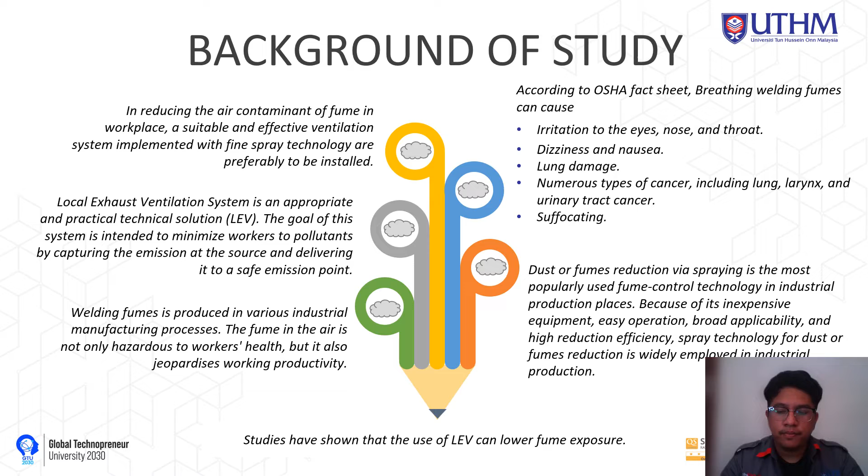The problem statement of this project is: as we all know, welding works are widely active in the industry throughout the globe. While working on welding, workers will be exposed to smoke, or what we call fume. Many workers don't even know what type of contaminant is contained in those fumes. Some of them are unaware that it brings harm to human health and also causes pollution. As such, a local exhaust ventilation system with a fine spraying system to act as a filter should be implemented in the industry. It will help reduce welders' exposure to welding fumes and divert the plume away from welders' breathing zone.

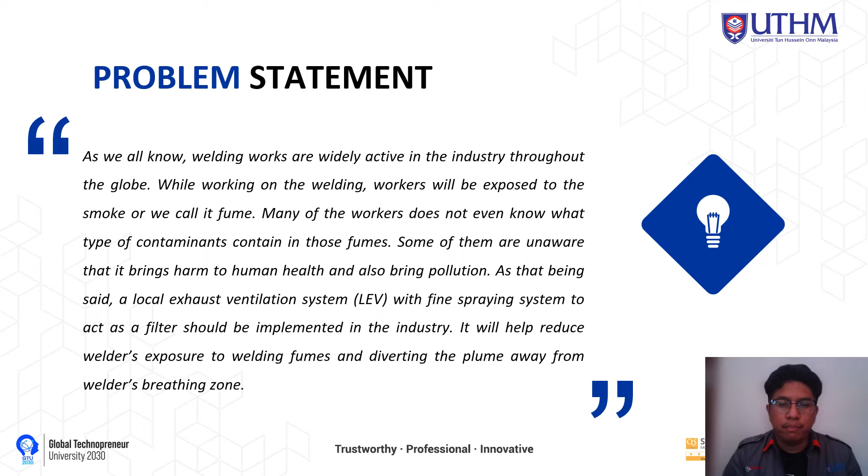Moving on, the objective of this study is to implement atomization technology in the welding exhaust ventilation system to remove air contaminants from a welder's breathing zone and work area.

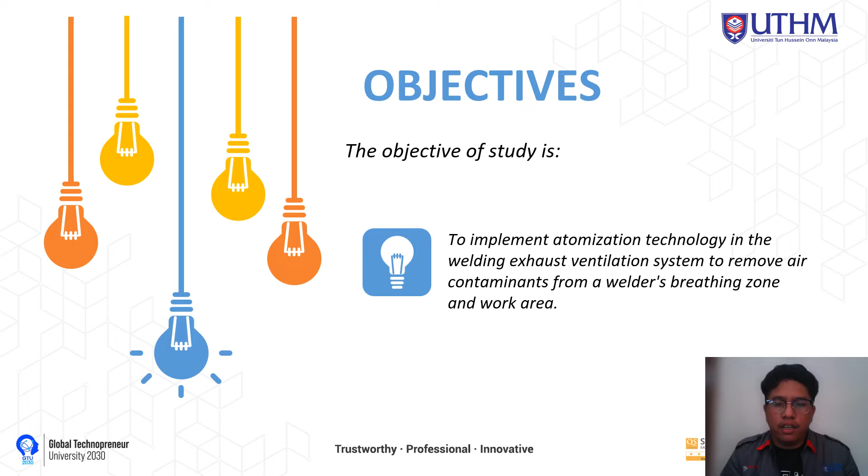For the scope of the project: first, doing research for the theory in local exhaust ventilation to overcome the problem and optimize the system. Second, the main element for the experiment will be carried out using a model of PVC local exhaust ventilation system. Third, the main instruments used to measure pressure, velocity distribution and temperature are a hot wire anemometer, tachometer and pitot tube. Fourth, comparing the fan efficiency of the LEV system without filter, with filter box only, and filter box with filter.

The next scope item: motor rotational speed used in this experiment is 500 RPM, 700 RPM, 900 RPM, 1100 RPM, 1300 RPM, and lastly 1488 RPM, which is the maximum speed.

The sixth item: the parameters of liquid pressure will be set to 0.3 megapascal (minimum pressure), 0.4, 0.5, 0.6, 0.7, and 0.8 megapascal (maximum pressure). The next item: the parameter for air pressure will be set to 0.5 megapascal, which is the optimum pressure for this experiment.

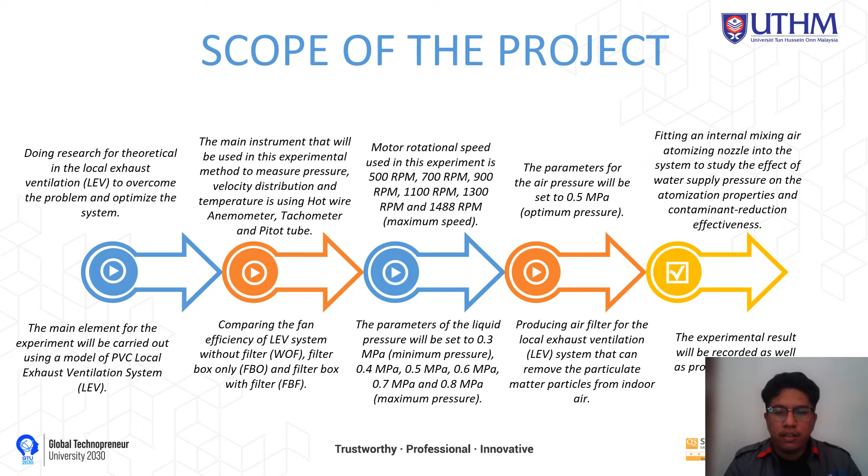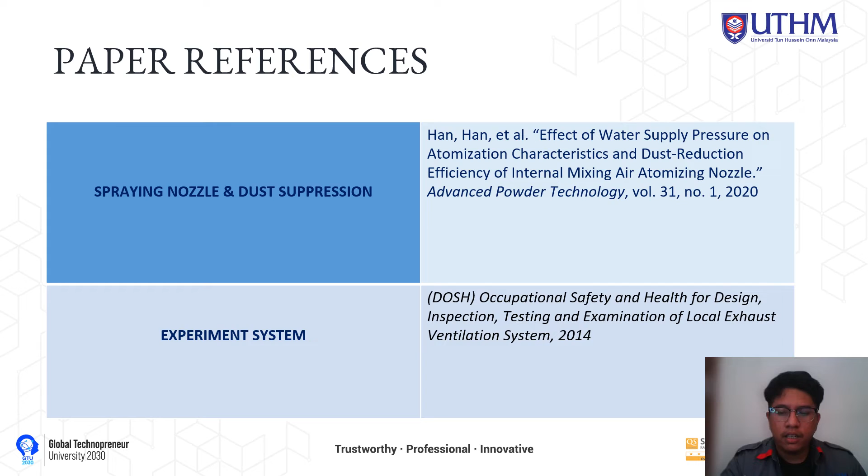Now we move on to the literature review. We have a few paper references which will be covered in this topic: spraying nozzle and dust suppression, experiment system, air filter, and welding effect on human health. The first one is spraying nozzle and dust suppression.

Internal mixing nozzles are commonly employed in industrial areas for dust control via spraying. The air supply pressure must not be too high or too low when using the internal mixing air assisted atomizing nozzle to reduce dust in the industrial workplace. The chosen air supply pressure ought to be close to the water supply pressure to provide excellent suppression efficiency for total dust and respirable dust. We can see here an example of a spraying nozzle internal mixing atomizer, produced by a company from China.

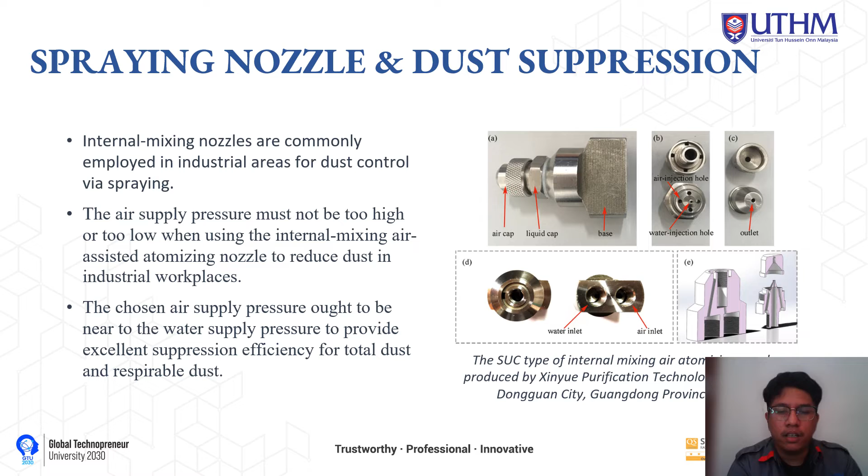For the experiment system, this figure shows an example of a local exhaust ventilation system. According to the Department of Occupational Safety and Health Malaysia, local exhaust ventilation systems are made up of four basic components: hood, ducting system, air cleaner, and fan.

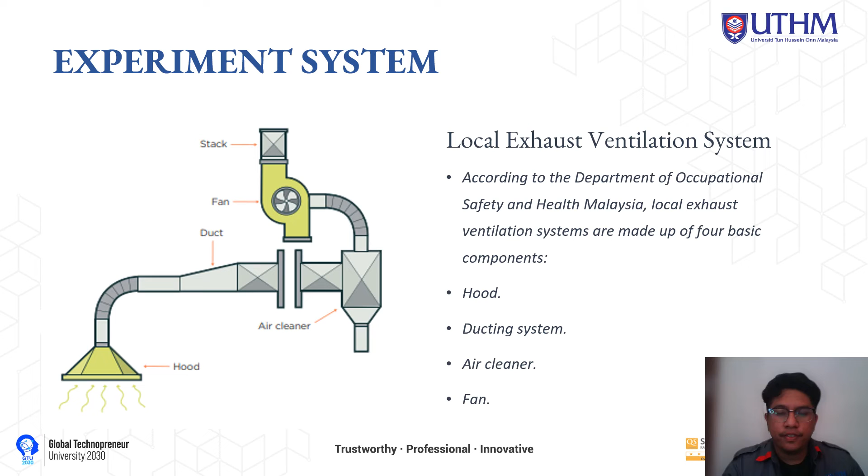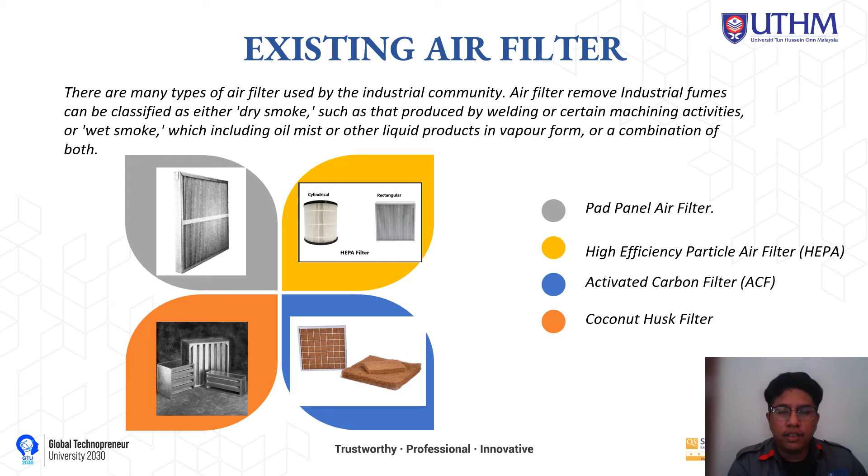Now we move on to existing air filters. There are many types of air filters used by the industrial community nowadays. The common ones are: first, PAD panel air filter; second, high efficiency particle air filter; third, activated carbon filter; and fourth, coconut husk filter.

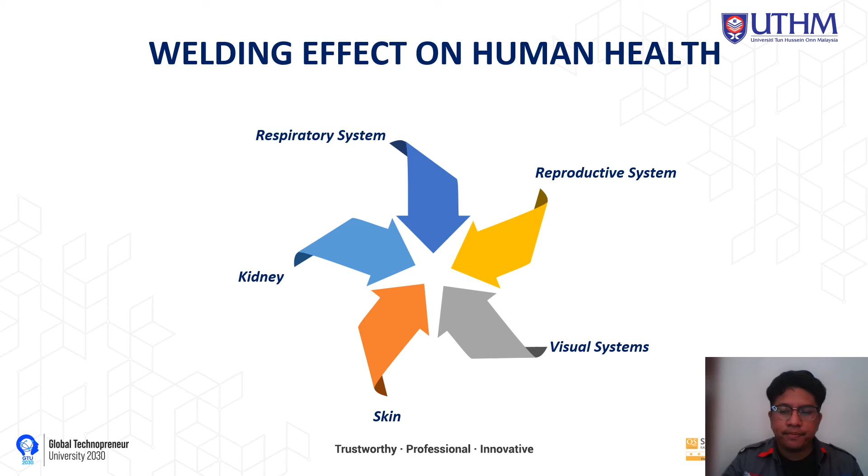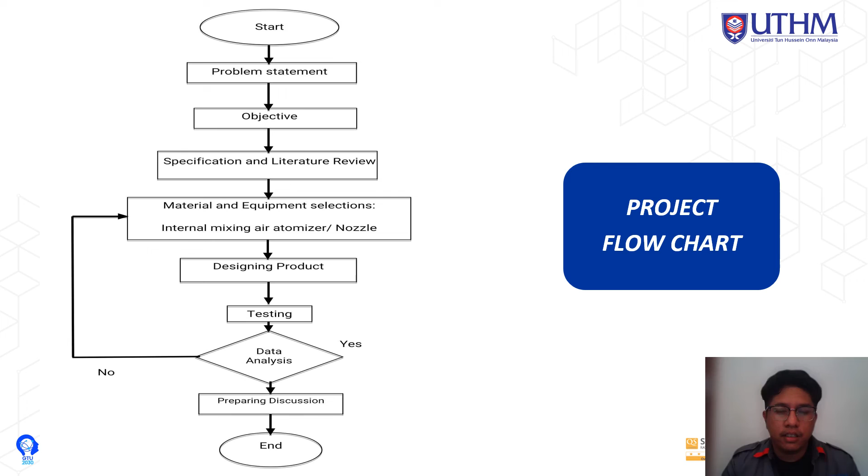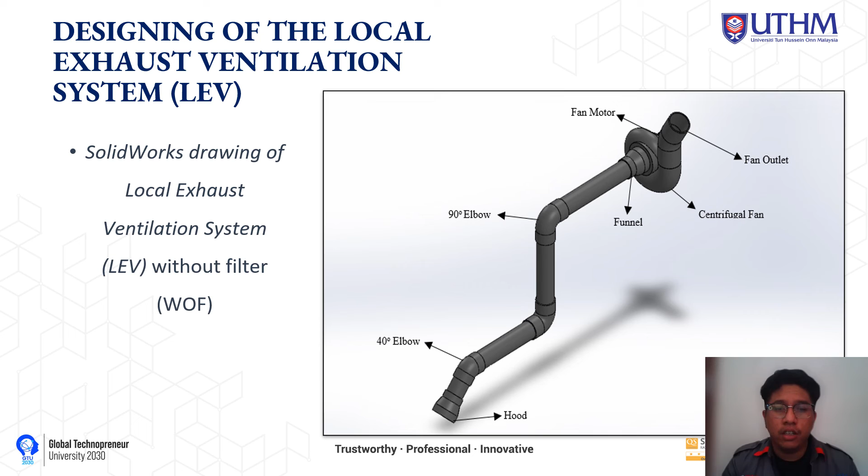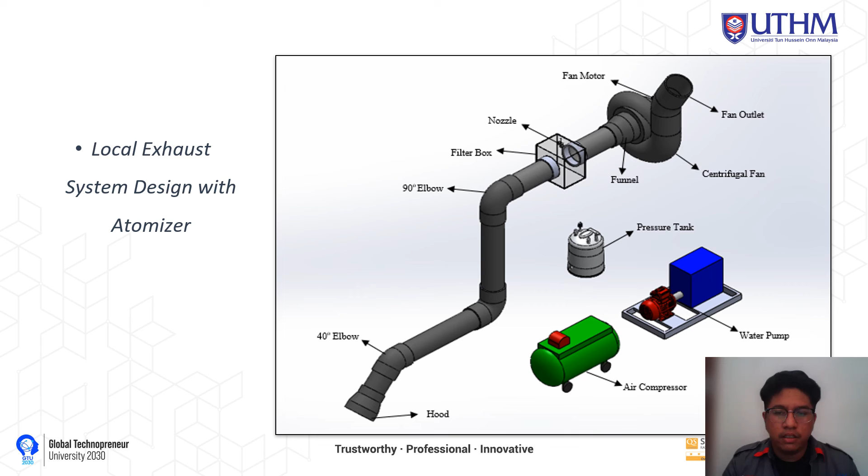For the designing part of the local exhaust ventilation system, this figure shows a SolidWorks drawing of a local exhaust ventilation system without the filter. Next, this is the SolidWorks drawing of a local exhaust ventilation system designed with an atomizer in the filter box, and other parts used in this experiment. Next is the drawing of an internal mixing air atomizing nozzle used in this experiment.

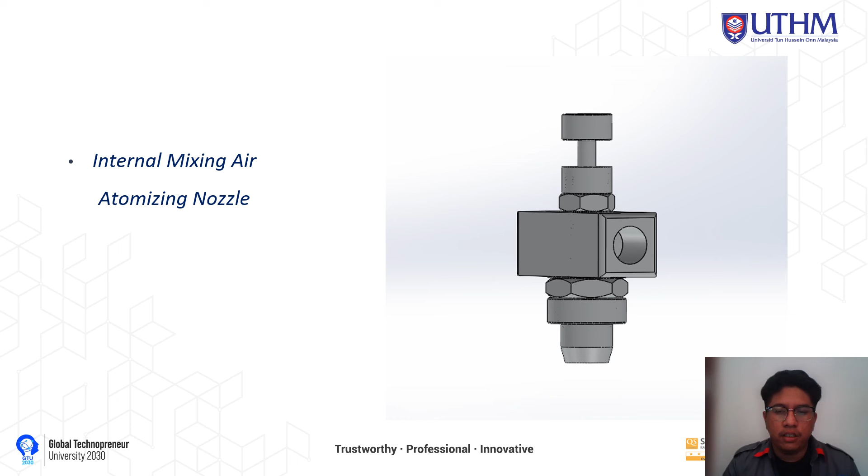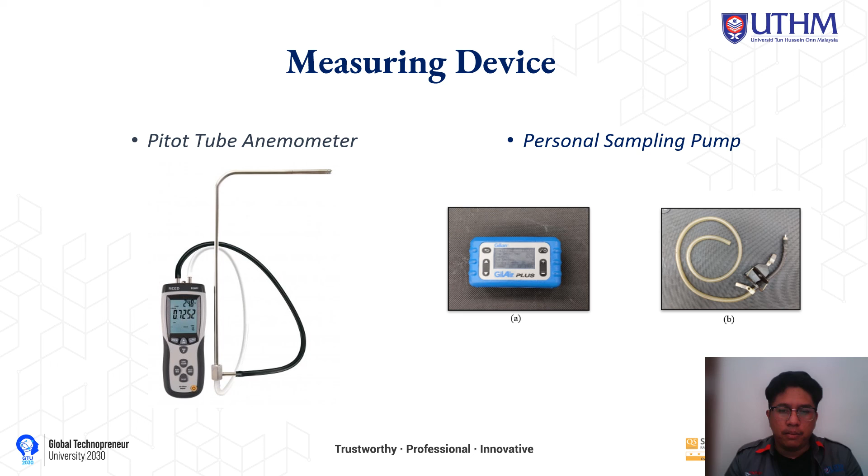For the measuring device, this is an example of a pitot tube anemometer. This device is the most suitable for calculating and collecting data on air pressure and air velocity. The second one is an example of a personal sampling pump, used to collect samples and test them in the project. For the experiment testing method, the ICP-AES method will be used for this project.

ICP-AES method is commonly used to analyze particles from welding smoke. The ICP-AES technique will be used in line with industrial standards.